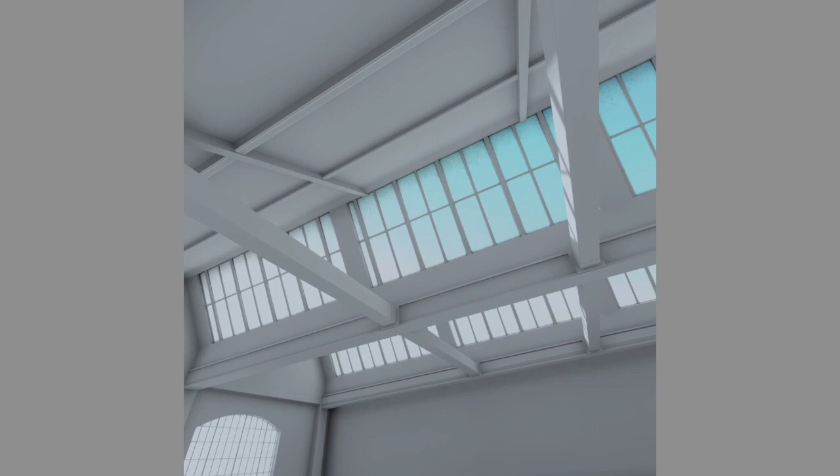This is the kind of standard environment you find yourself in in Gravity Sketch. This is the creation studio - it's a virtual warehouse, complete with dirty windows, for you to do your modeling in.

I've only really been using Gravity Sketch for a couple of weeks, so I'm no expert, but what I thought I'd do is try to take everybody through how you can use Gravity Sketch to maybe 3D model some characters. It's more of a sculpting style 3D modeling program. So if you're used to 3D modeling on a computer, say Tinkercad or applications like Fusion 360, this is a bit more sculptural - something more akin to Blender or Cinema 4D or one of those packages.

What I'm going to try and do is model a kind of cartoon character and then take that and 3D print it on one of our 3D printers here in the lab.

So the first thing I'm going to do is create a new sketch. Discard my current session - there we go. And I'm going to go to my settings and turn on a couple of settings that I'm going to need for this.

One thing I'm going to do is work in what's called mirror mode. So basically anything I do on one side is going to be mirrored on the other, which is useful when you're creating characters, because faces and bodies are typically kind of symmetrical.

The other thing I'm going to do is turn on our vertical lock. There's a few other preferences here that might be useful. Input smoothing is probably okay on default.

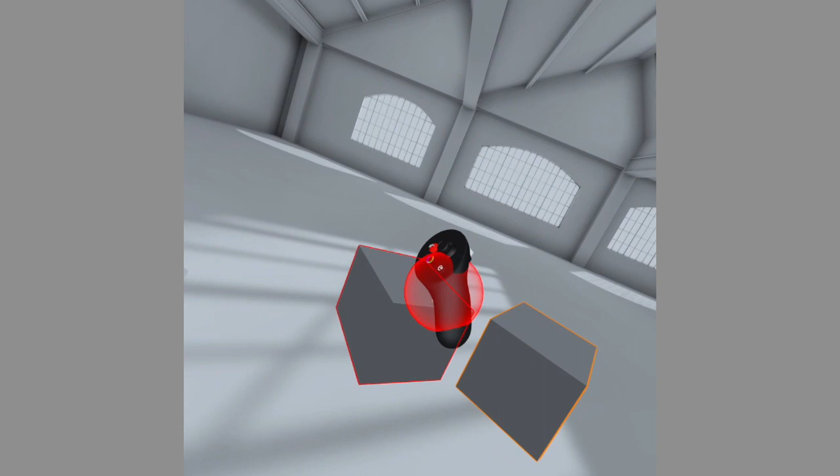If I select an object, the way I can select it is with this sort of ball that surrounds your drawing hand. If I touch on it, you notice it highlights in red, and then I can use my grabbing hand to move that around. So now I can pick up the objects and move them wherever I want in 3D space.

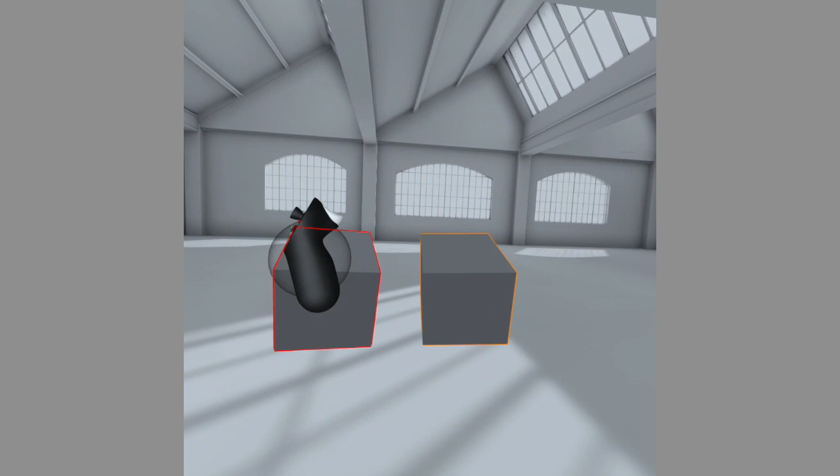What I'm going to do is position them close to each other, then go into editing mode, which you enter by pressing the blue button on your non-drawing hand. That brings up a new menu, and you notice it's put points on the corners of the object. If you're familiar with Tinkercad, you're familiar with these kinds of nodes on the corners of objects to make them bigger or smaller.

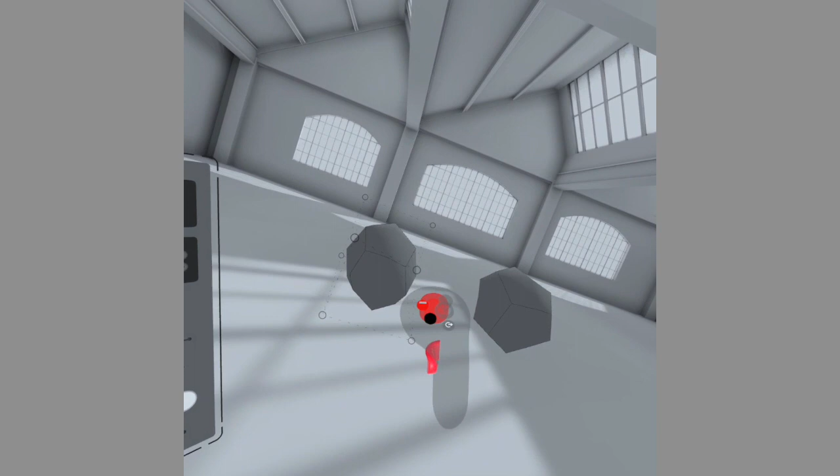At the moment, we're in subdivision level off. If I turn on subdivision, you notice it makes the object much more sculptured. And if I grab one of these, I can pull them out like that. If I turn the subdivision level up and up, it turns it almost into a sphere.

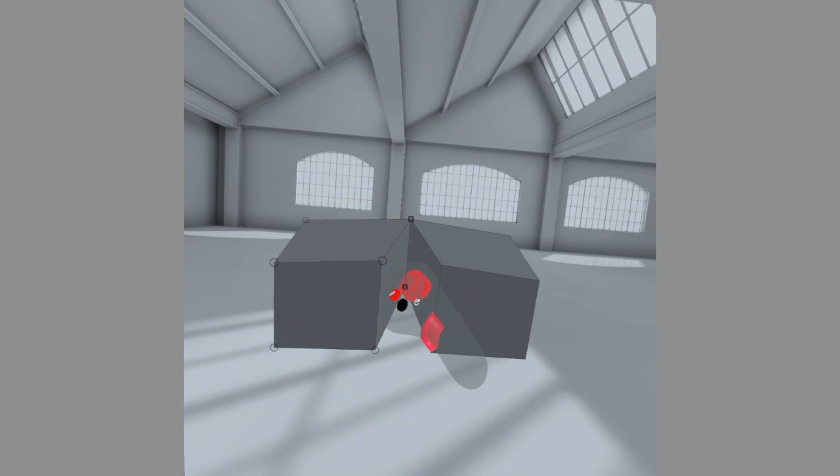For now, I'm going to turn subdivision off because I want to join these two objects together. If I grab the bottom corner and bring them together, you notice they snap together, and they have a little locked icon to show they're locked together. So now anything I do on this side will be mirrored on that side. If I move these ones here, it moves there too.

What happened there was I actually created a new node by clicking on the line. So again, similar to creating extra nodes in a drawing package or whatever.

So if I turn subdivision on again, it makes the object much more sculpted and human-like. What I'm going to do is just get the basic geometry of a head here. I'm going to get rid of my menu, turn this around, and basically pull these out to create a kind of head shape.

Coming up there, pull that down there. That's looking okay. Maybe bring that down a bit more like that. This is going to be a kind of alien head—it's not really that human-like, so I'm not too worried at the moment exactly what it's looking like, but that gives us the basic shape.

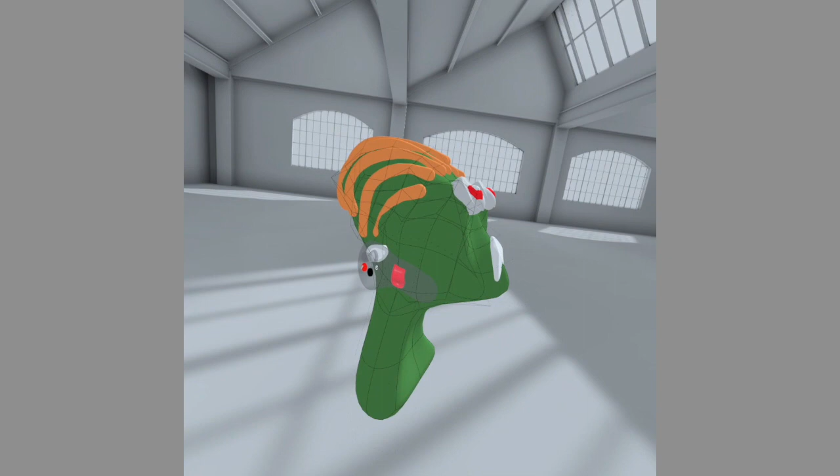Okay, I'm going to draw another circle, another tiny circle, and change the color of this one to be kind of a reddy color. And again I'm just going to scooch that down and put that in there like that. I think he's looking more like Kermit the Frog now.

Let's make that selection very small so we can change that there like that. What I might also do is just select that one, maybe make another one, a smaller circle here. Change the color of this to be white.

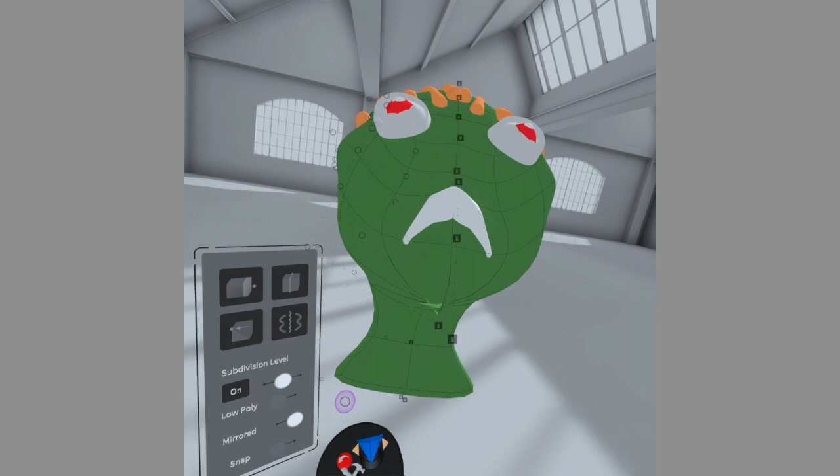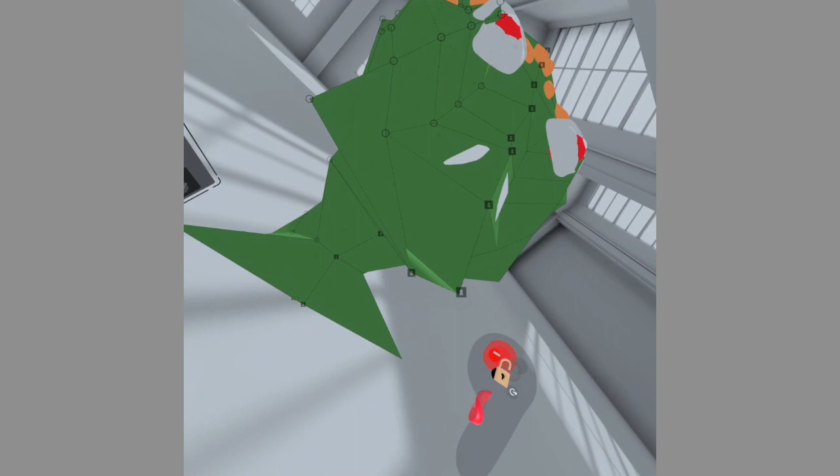Change the size of this — oh, nope. Change the size of this to be teeny tiny, like that. And just kind of put that in there to give a bit of a highlight. There we go, that looks quite good. Okay, he's looking okay there.

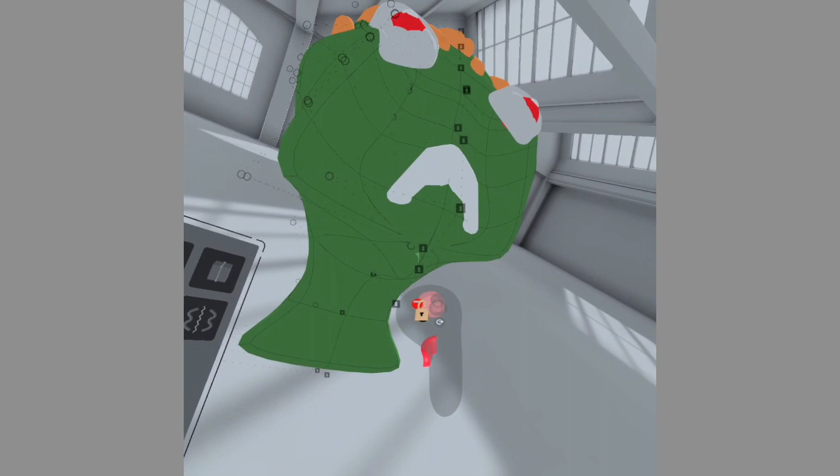What I'm also going to do is maybe a kind of mouth, like teeth. So I'm going back to my tools, and for that I'm going to use a volume. Volume lets you kind of sketch a shape and then extrude it. I'm going to select point mode, which lets me use actual points. I'm going to change the shape a little bit smaller there, like that.

Get rid of my menu. So if you notice here, I can change the size of the actual thing up and down, and then change the selection that way. So I'm going to just start off with a small point here and select one point, and you notice it kind of drags out a strand like that, and drags out a shape there.

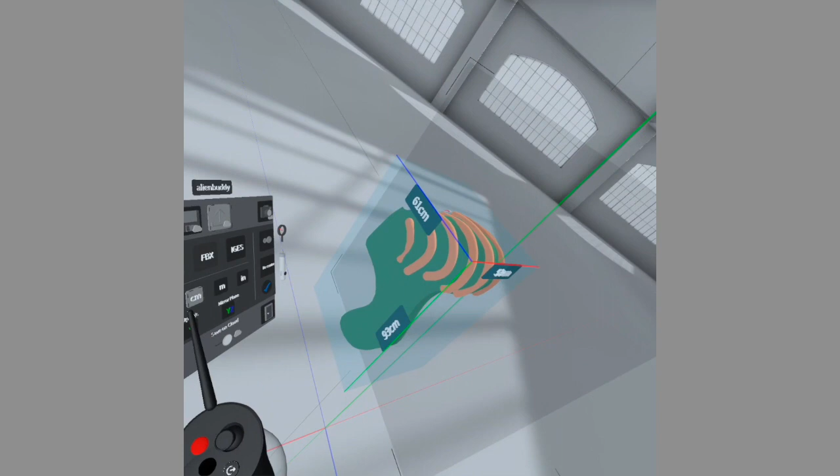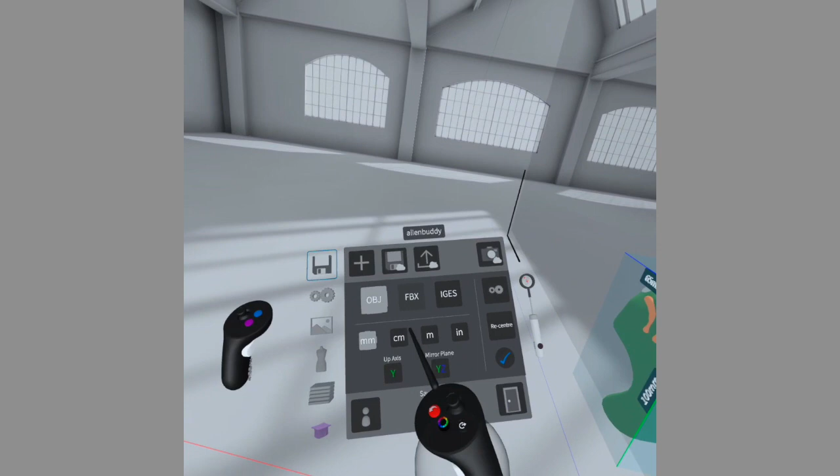Maybe like that. To finish up, all I need to do is press the trigger in the other hand and it cancels it. So now I have those. Again I can kind of scale that down, and I'm going to put that maybe like the other way, turn it up around that way, like that, kind of a walrusy type of thing, like that. Yeah, that could work quite well if we just angle that back in a little bit.

Let's zoom right in so we can get real fine control. If we click this and then click that, we have our things. We can actually zap them together the way that we did the other one. That's probably better for us. Turn that off, click OK.

Okay, let's zoom him down. He's a very strange looking alien. One thing I noticed here is I do need to angle that round a little bit more, just to sort of sit that in.

There we go, he's looking a bit strange. What I'm going to do is just put some kind of tendrils coming over the back of his head. So I'm going to go back in here, and for that I'm going to use a stroke.

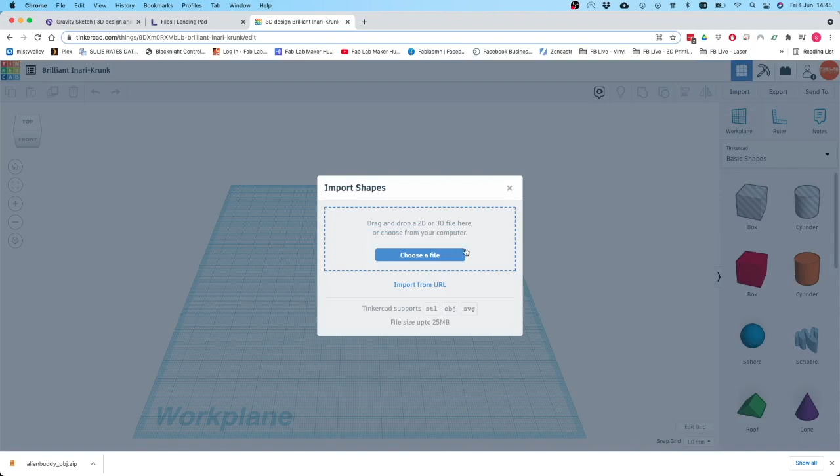For the stroke, I'm going to use a point mode and use that there, that's fine. Get rid of that. So I'm going to kind of turn around this way here, like this. Again, it's going to be kind of repeated, the kind of shape.

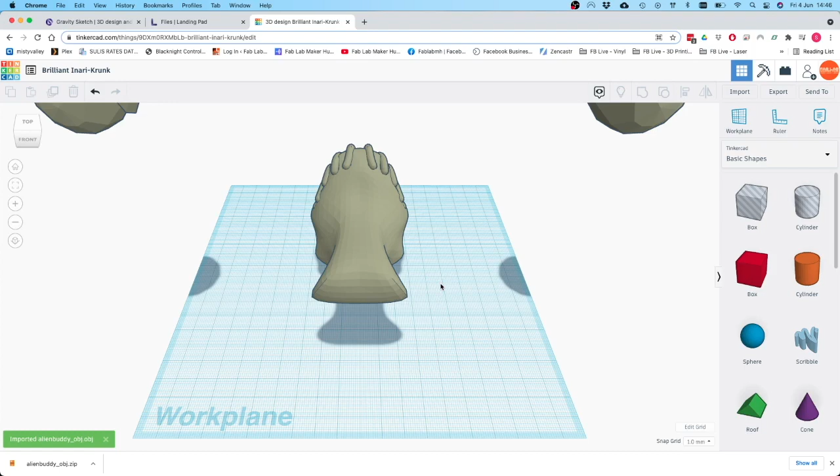What color will we use for those? Maybe use kind of a yellowy orange color like that. Okay, so I can kind of start off and give him some sort of textured shapes just coming over his head, and then if I want to finish, I just press the trigger button. Whoop, didn't press the trigger button.

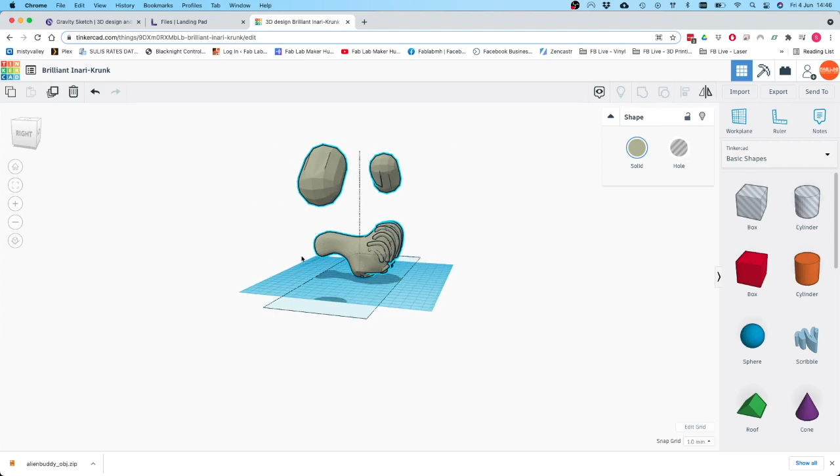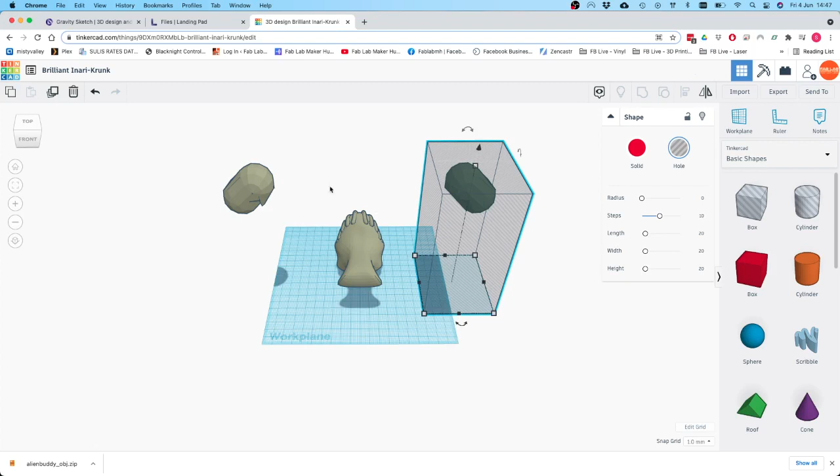There we go. Okay, let's turn him around, have a look, give him a bit of a hairdo. I don't want to go too near the edge there, and I do want to just kind of keep it like that. And maybe one more coming round here.

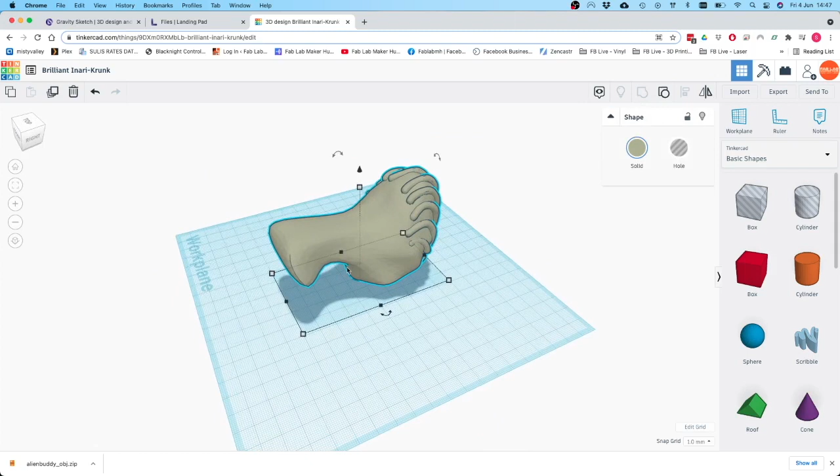I want to undo that. To undo, we have a kind of button that lets us undo, which is the red button there. So I can undo that and just start again there.

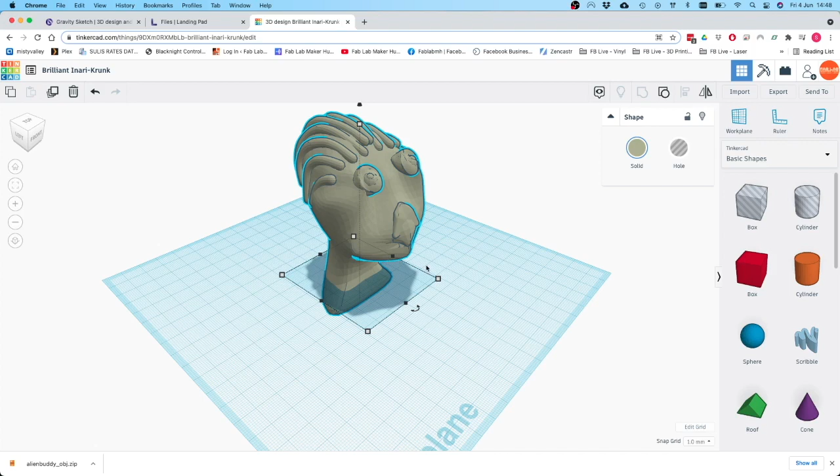There we go, I think one more maybe. Yeah, one more, we'll go one more. Why not? Okay, and like that. There we go, he's looking a bit weird. He's looking very alien, I have to say. Not that scary, although I wouldn't like to run into him on a dark night somewhere.

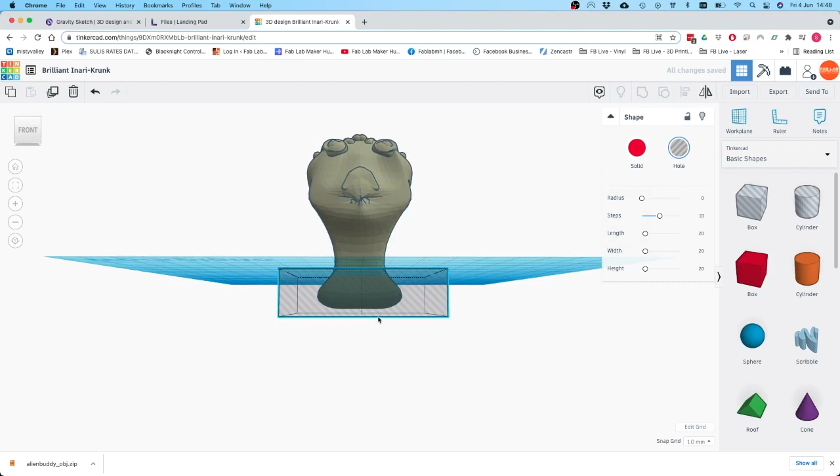So the next thing we want to do is go back to our layers. So we've got our eyes. I'm going to lock that layer, go back to my head layer. Warning, active layer is locked. So I have to unlock the layer. That's the one thing I forgot to do, was even though I switched to the head layer, I forgot to unlock it. Okay, let's go back here.

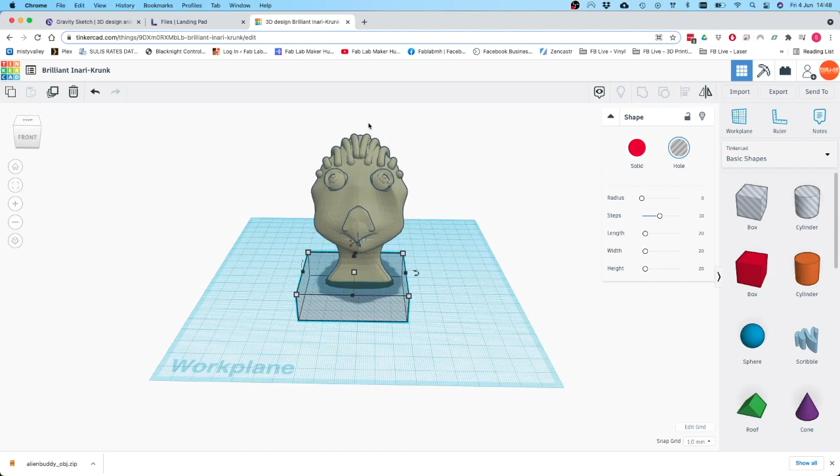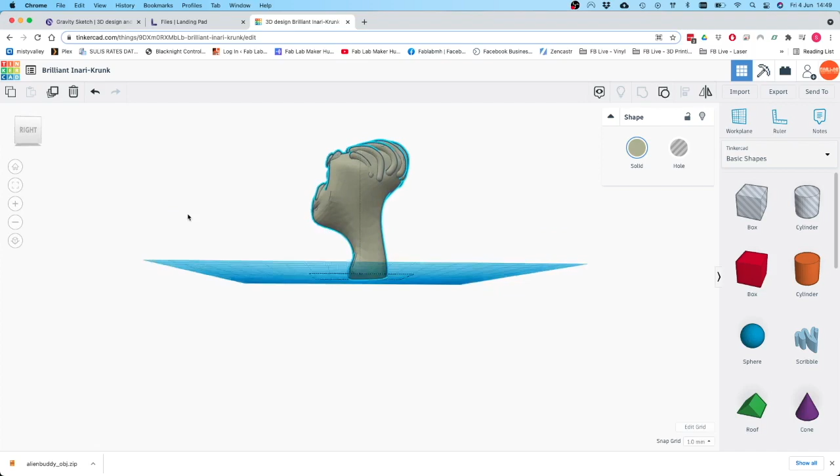So again, I got my head here. What I want to try and do now is just go back into edit mode on the model.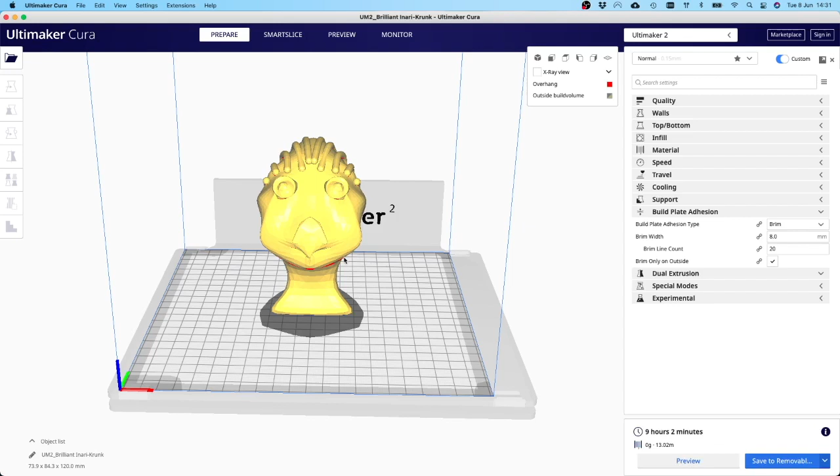Now that has kind of mucked up some of the geometry here. So what I'm going to have to do is go back in and probably turn off the subdivision there, and just make sure that some of these points are in the right place.

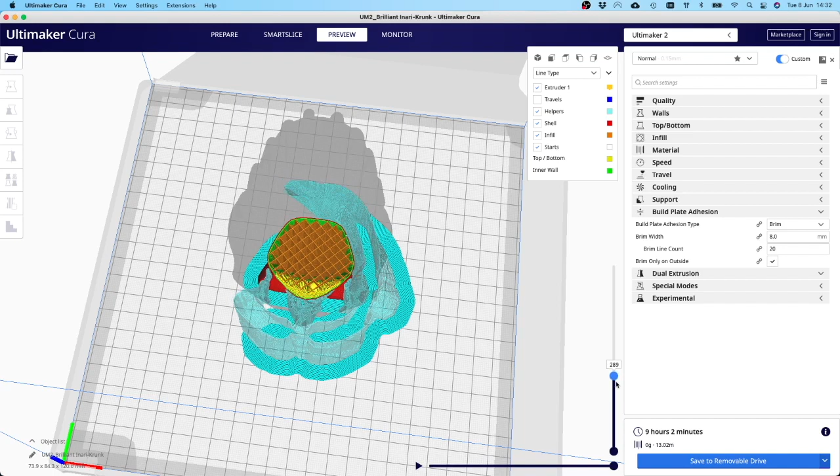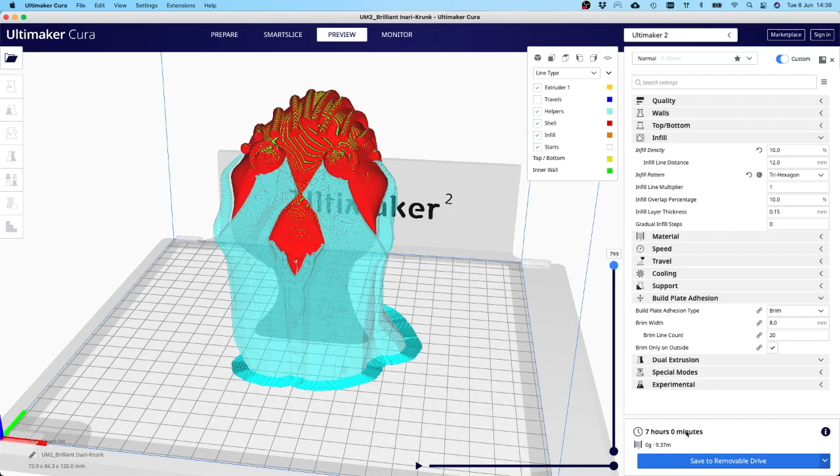As you can see, this one here and this one have kind of got out of whack with each other. That one should be a bit more like that. Now if I turn that on, I can kind of see where my problems are lying, which is that node there, which needs to be out here a bit more.

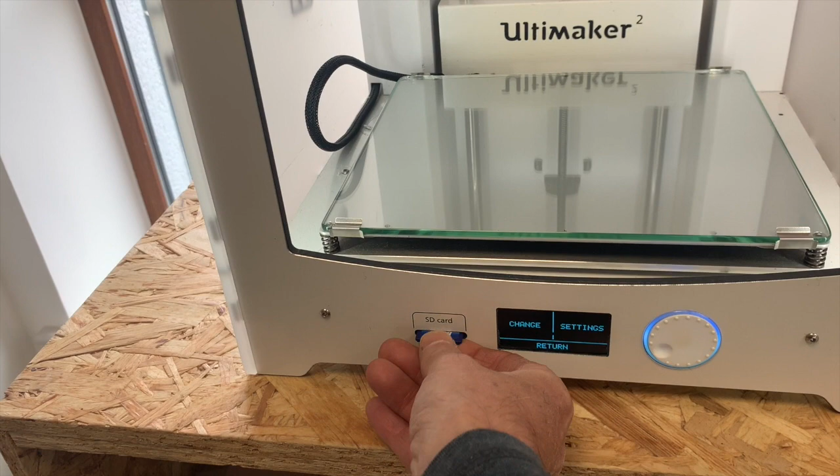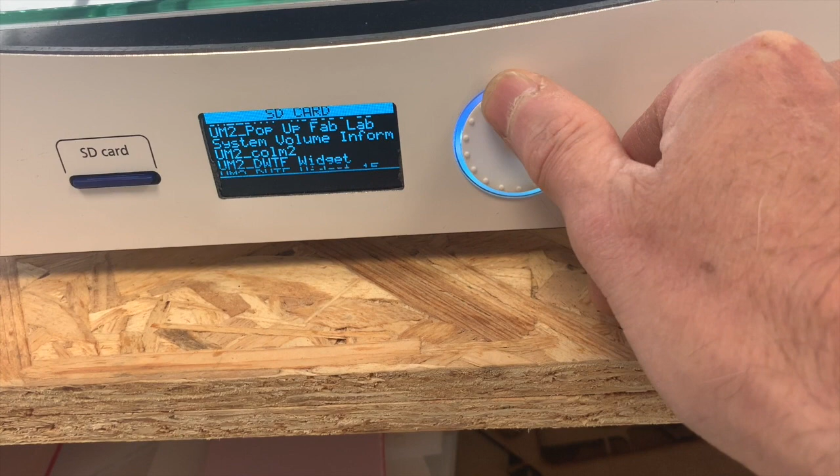There we go, click OK. He's looking a bit weird, but that's pretty good for an alien. So what I'm going to do now is export this model.

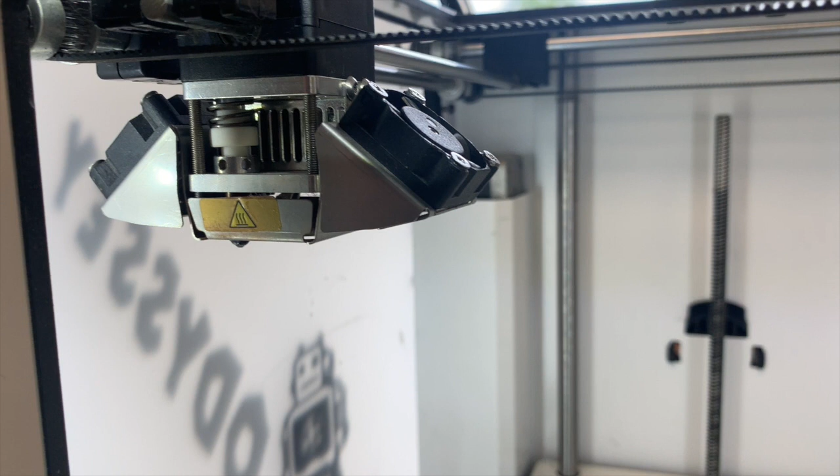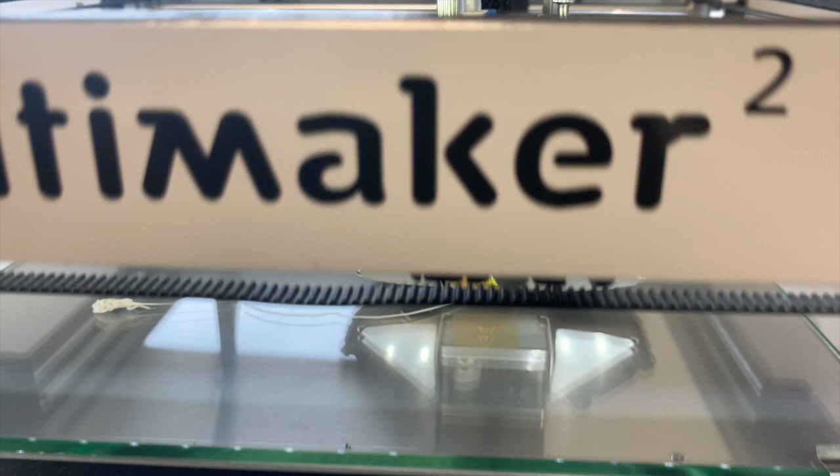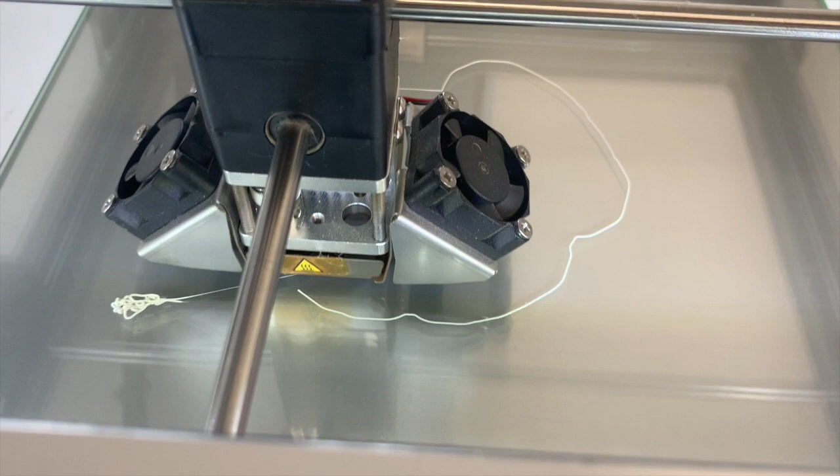At the moment it's going to save onto the cloud. The way Gravity Sketch works is you can save either to your headset or it will save up to the cloud. Since I'm going to be moving this to another application for 3D printing, I want to save it onto the cloud. The other thing I want to do is also export it.

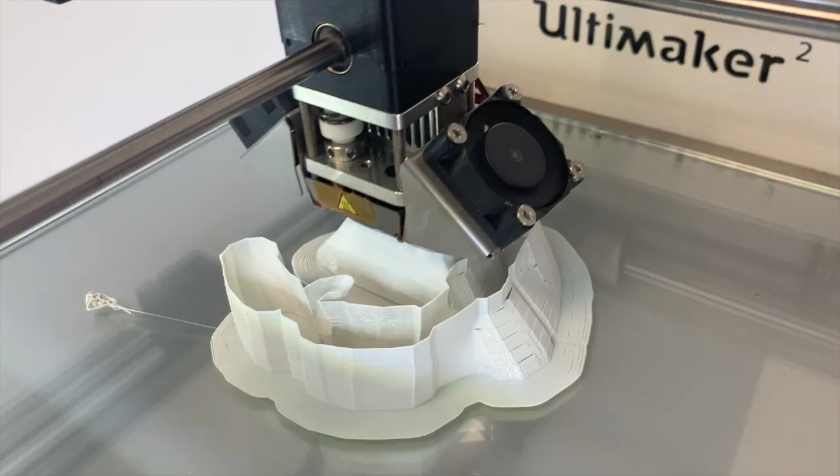So when you go to export, it gives you the dimensions you're going to export it as. For 3D printing, I'm going to change that dimension. I'll make it 100, clear, 100 millimeters. There we go, so it's going to be 100 millimeters high, so 10 centimeters high.

And then I'm going to save it as an OBJ file. Export. And we're done. Delete. We've now exported that up to the cloud, so we can take our Alien Buddy and bring him into our 3D printing.

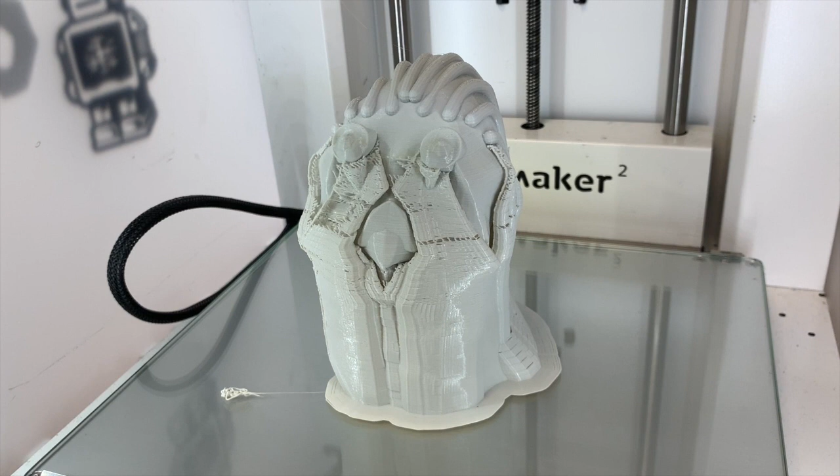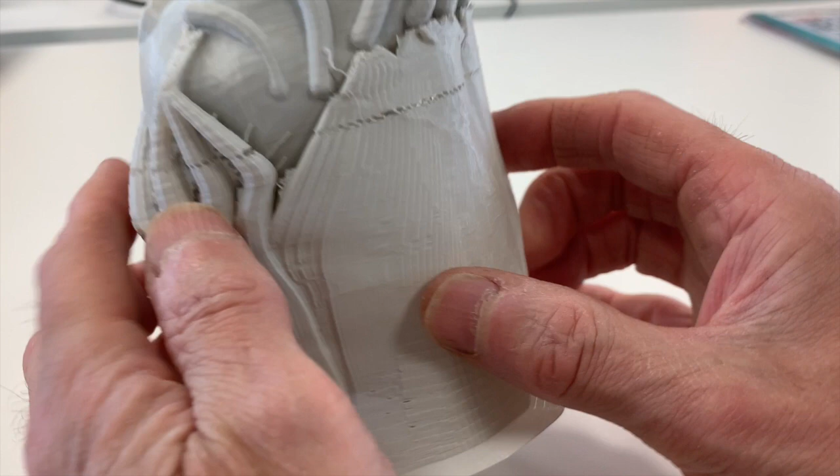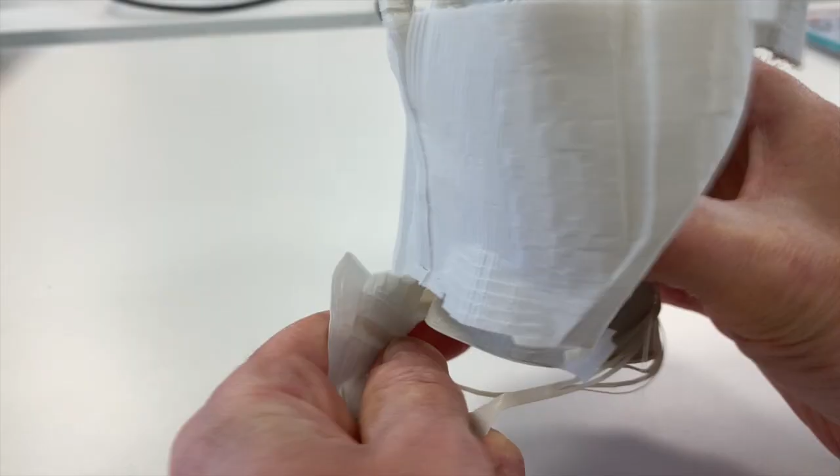I can see here already there's a bit of a mistake, I've left an object in it. So I'm going to download this. There we go, it's downloaded.

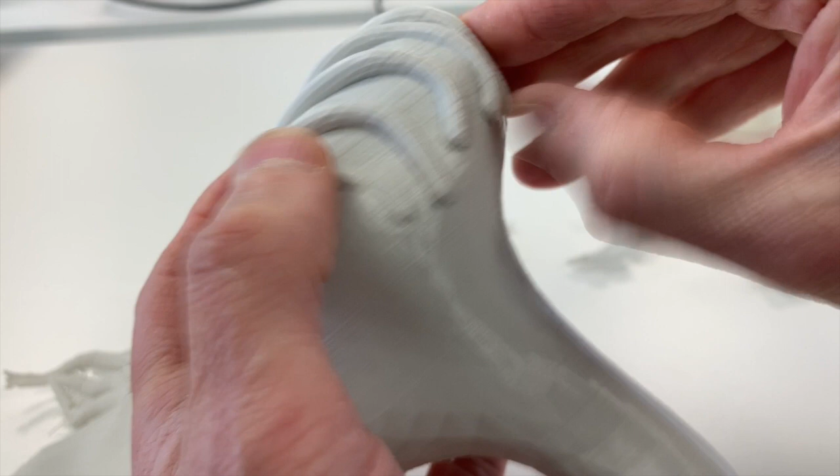So what I'm going to do is bring that into Tinkercad just to clean it up so that I can 3D print it. So I have Tinkercad open here.

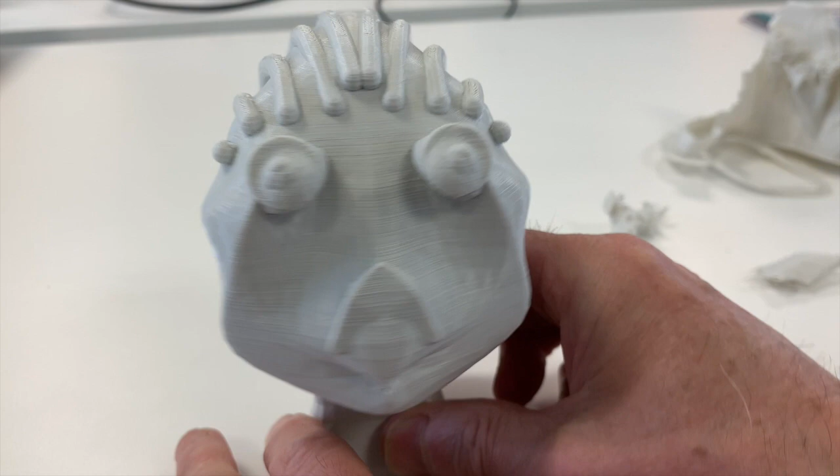I'm just going to create a new design in Tinkercad. I get a blank workspace. I'm going to import my file, select choose file, go to my downloads, go to my Alien Buddy folder, and open up my file. It says I need to select the scale, so this is millimeters, and it's going to import my Alien Buddy file for me. So now I'm in Tinkercad.

I can see here, I'm just going to zoom out. Whoa, zoom out. I can see here that I have these things that I accidentally left behind, so I'm going to need to get rid of these. And my model is kind of upside down, so I'm going to need to change that as well.

So what I'm going to do is just grab a box that's a hole, and I'm going to grab that and move that there, and duplicate that, and move another one over there. So both of those pieces are inside the hole. I'm going to select everything and group them together, and that should get rid of those. There we go, now that's good.

So now I can zoom in. What I want to do is just turn this up the right way, and turn him around to the front of the work plane so we can see him. What I want to do is cut off the bottom of the model so that it has a nice flat bottom, so that when we're trying to print it on our 3D printer, we have a flat bottom to go onto the print bed.